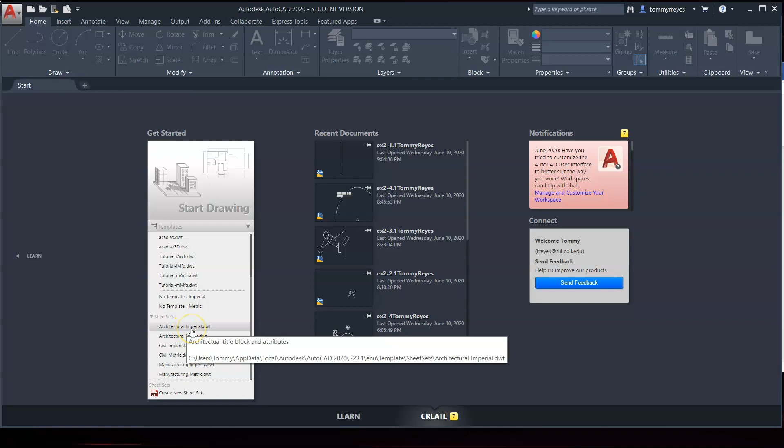That'll start on page 2-1. So let's get started. Click down on this menu right here, open Architectural Imperial Drawing Template, it's DWT for drawing template. Click on that. We're in paper space, so we need to jump into model space. This is the architectural D sheet.

All right, so the line command. Let's go over it real quick. Line command is the letter L, the keyboard command. It's also right here, but I like to use the keyboard. The commands are quicker when you're drafting, and you stay focused, instead of having to go up here looking for an icon. Eventually the keyboard commands become second nature, and you stay focused on your drafting.

How the line command works: type the letter L, and you can see with any command, if you start spelling what you want, it will bring the command up. If I want to enter the command, hit spacebar, and now I'm in the command, and it's telling me right there in the middle of the screen, specify first point. Now I can specify the origin. The origin is 0, 0, 0. Look at that, origin is right over here.

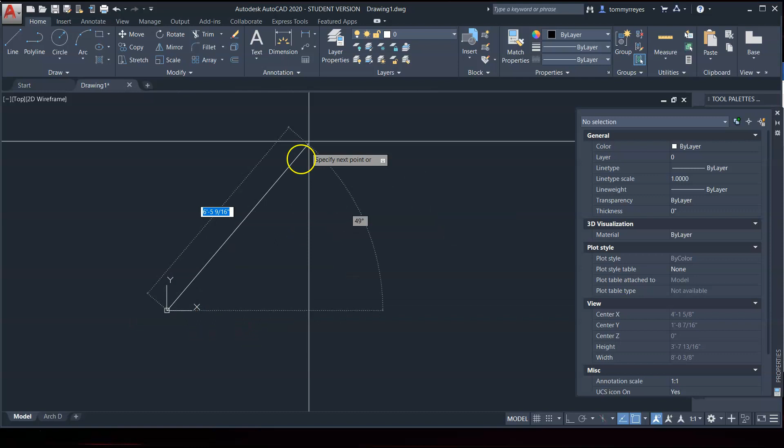I can specify the length, and when I typed that 0, 0, 0, that was me entering coordinates. I don't need to do that anymore. I can specify actual lengths. And if you notice down here, here is ortho mode and polar tracking.

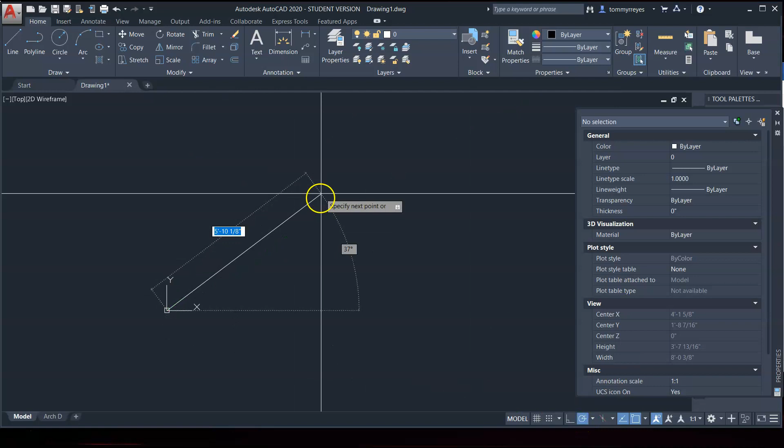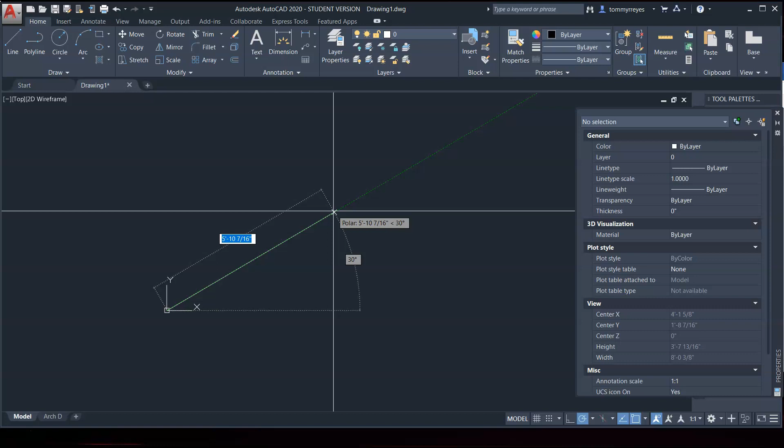Let's just click on polar tracking, and AutoCAD helps you draw lines. And if you noticed, I am drawing this 5 foot 10, 7/16 inches at a 30-degree angle if I was to left click right here. You can see from my cursor there's an extended green dashed line. That's AutoCAD trying to help you, letting you know you're at 30 degrees, or 15, or 45.

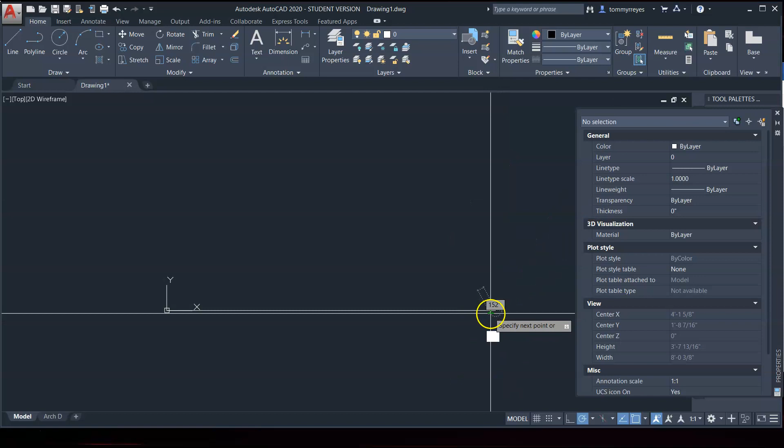Anyway, the reason I'm showing you this is because you can also utilize that information. So let's just make this an even 10 feet. Hit enter, and it is still connected to that endpoint of that line. Again, this is AutoCAD trying to help you out. It's assuming this might be some sort of continuous outline of some two-dimensional geometry. If I want to get out of this command, I could just hit escape.

Inversely, if I want to get back into the command, I can type the letter L and hit the space bar, or there's a shortcut, hit the space bar, and it'll take you back into the last command you were in. Notice how there's that box right there, and then it just said endpoint. That is your osnap. We'll get into osnap in another video. Right now we're just going to focus on drawing lines.

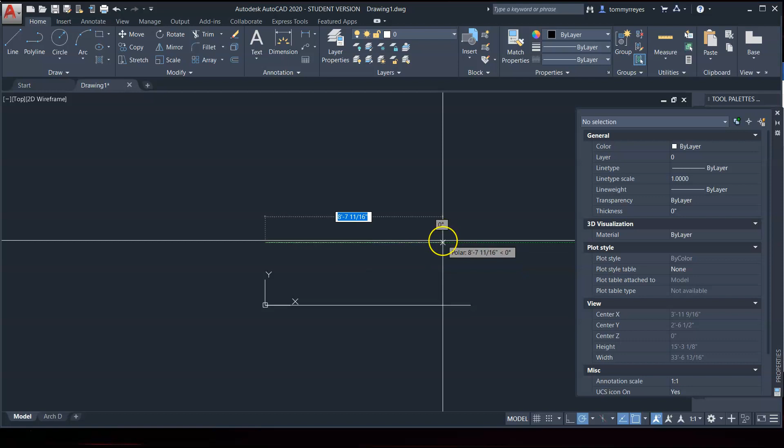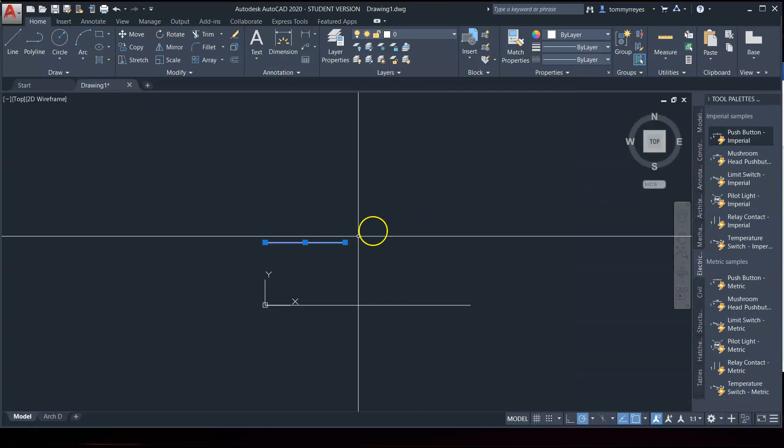I want to draw another line, and show you how to draw in feet. So let's just draw 3 feet, 10 inches, and let's say I want 3/4 of an inch. Hit the dash, 3/4, and there you go. If I want to double check that, I can check it right here in the properties palette. If this palette wasn't up, I can highlight any line, right click, go to properties, and this properties palette will come up.

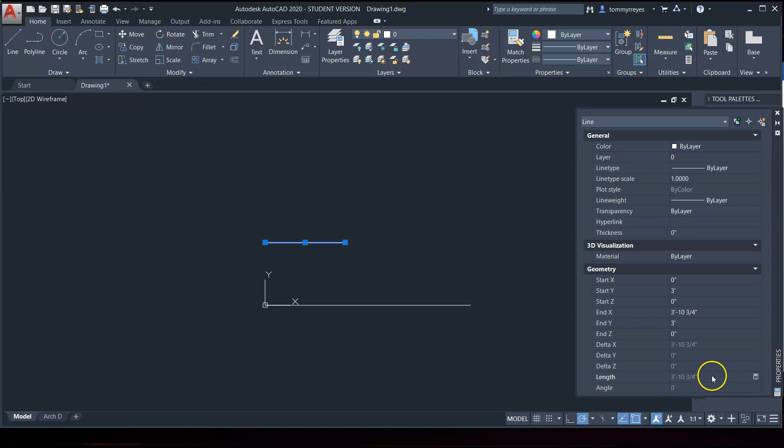One more thing about the line command. So not only can I specify 3 feet, 10 inches, let's put 7/8, if I hit tab, this is part of a dynamic command that AutoCAD has. If I hit tab, you'll see to the right there's a 0 with 0 degrees, and now I'm on that. I can type in 33 degrees and hit enter. So I drew the line at the specified length, 3 feet, 10 and 7/8 of an inch, at a 33 degree angle.

And you see the angle right here. So all that information is stored within the program. You can identify what you did in case you lose your train of thought or get called somewhere. And that is the line command.

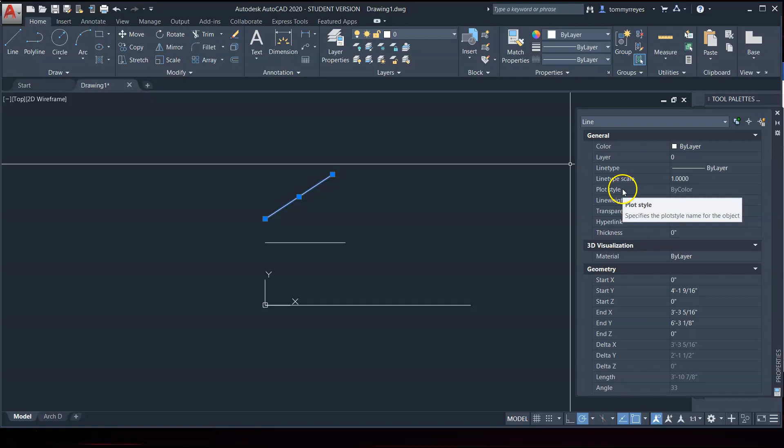And so we went over to properties, palettes. Let's go back to properties palette. The properties palette shows different layers. You can change the color if, let's just say, I am creating other lines to help me draft the lines that I want to keep. We call those construction lines.

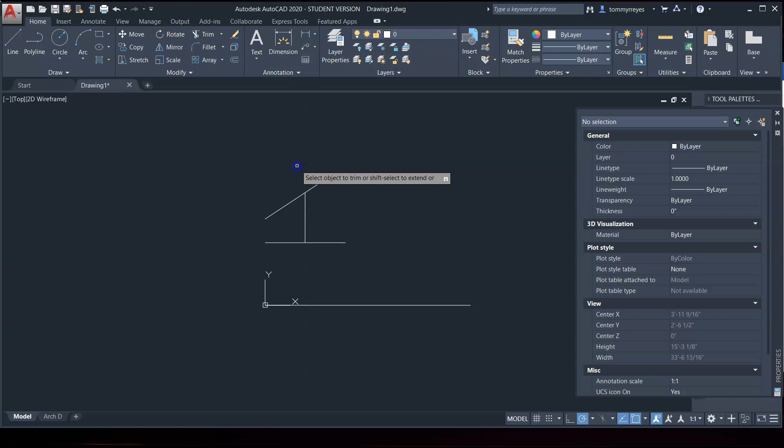So for example, if I want to draw a line here to here from this midpoint, and I want to keep this little intersection but get rid of this top part, I can do that. And let's just say I needed other pieces of information, but I didn't need this. Or I need this, but I don't need it. I need to delete it later.

I can change the color to indicate, to give myself a visual of what I need to delete later. Typically, I make a layer, and I put every construction line that helps me draft on that layer, so I know to erase it later.

I also make sure that when I do create that layer - we'll talk about layers later, they're right here, and we'll talk about how helpful they are. If I accidentally forget a line, it doesn't print out. So I put it on a layer to where it's definitely noticeable that I need to either delete it or ensure that it's not going to get printed out.

Other information that you see, it tells you what scale you're drawing in the tools palette. I've got to select something. Like this one, tells me the angle, the length, the line type. There's various line types. Right now we don't have very many, but there's other line types that are readily available.

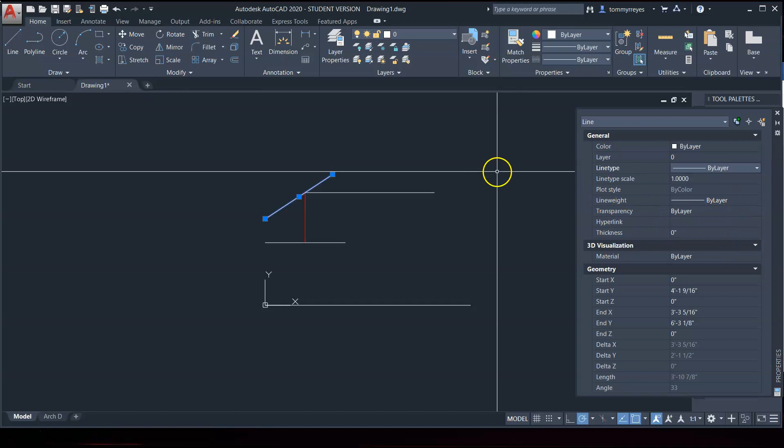In fact, let me open a file to show you just that. So there's a line type for wall, and this line type is done by layers. So you can set up your layers to create a particular line that you're going to use for a wall. And this is a continuous line.

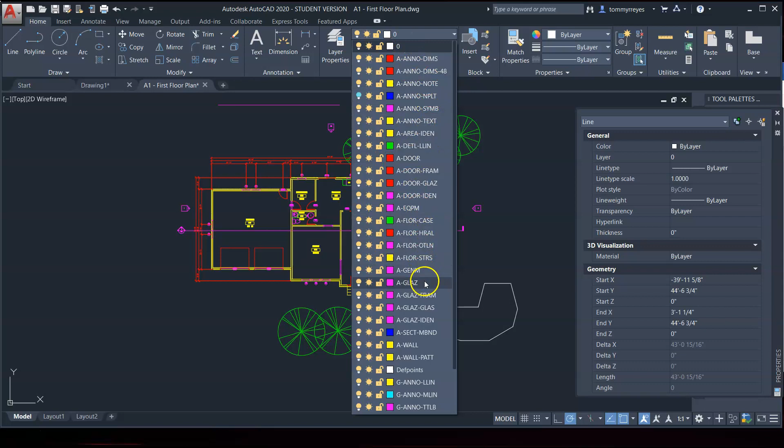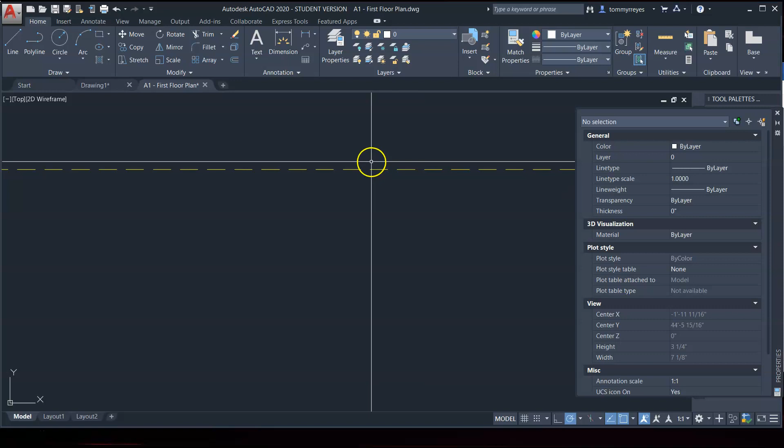There's other lines that we use in architecture, and engineers use it as well, that indicate different things, like hidden lines. Let me see if I can put this on a layer that has a hidden line. Or I could just change it to hidden. And if I zoom in, you can see that it is now a dashed line. Hidden lines indicate that there's something that is underneath or behind something, and as a drafter, you will get to know these different line types.

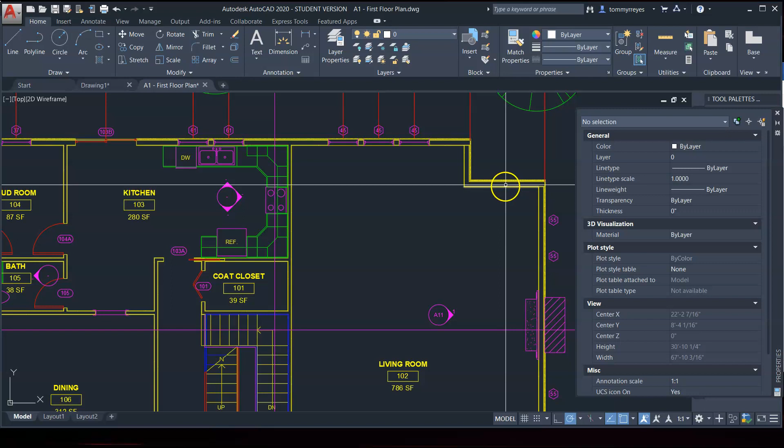Line weights deal with the thickness of lines, and so the thicker lines, typically you want your walls to be a pretty thick line, your text pretty thick and vivid. When you print this on a bond sheet of paper, there's certain things that you want to stand out, and there's certain things that you really don't want to stand out. So like this cabinetry here, because if everything really stood out, things are harder to read.

But if this was like a gray, and this was a lighter gray, and everything in purple was a lighter gray, and everything in green was a medium gray, you can see variation, and that contrast helps the mind process information quickly. This is why we have layers, and this is why we control our line types and line weights. We'll eventually get into that in more detail in another video, and I'm just trying to give you a heads up of what to come.

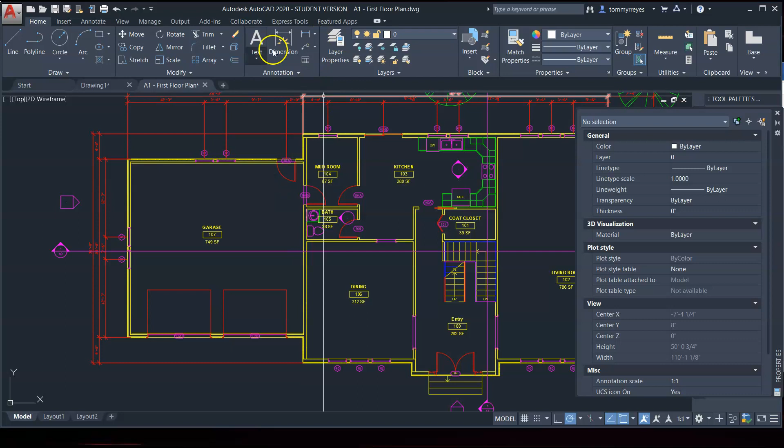All right, so if you turn to page 2-8, we draw everything to full scale. So that was just an example. Annotation scale is right here. I know it also says it in the properties, but that's a little different - that's talking about one particular line. This is talking about the whole drawing. So when we deal with the whole drawing, a 1-to-1 scale is the ratio that engineers use, and that's correct as well. But architects use 1 foot is equal to 1 foot, and so I typically use that.

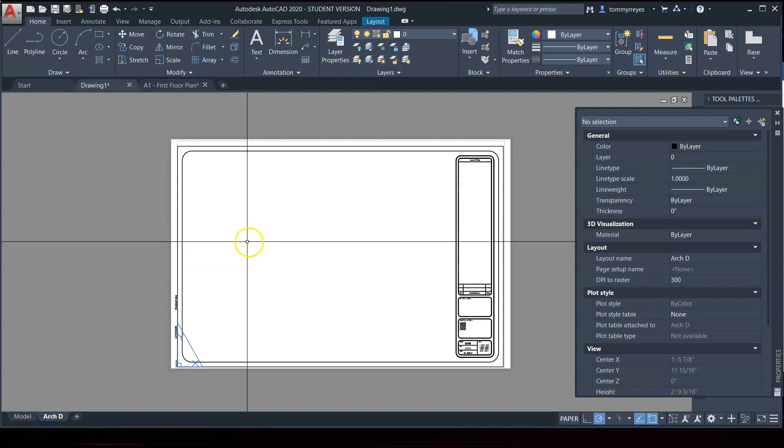And now our drawing is in full scale. The reason why we do it in full scale is so there's no calculations needed. I can go over here and jump into here and create a viewport. We'll get into this later.

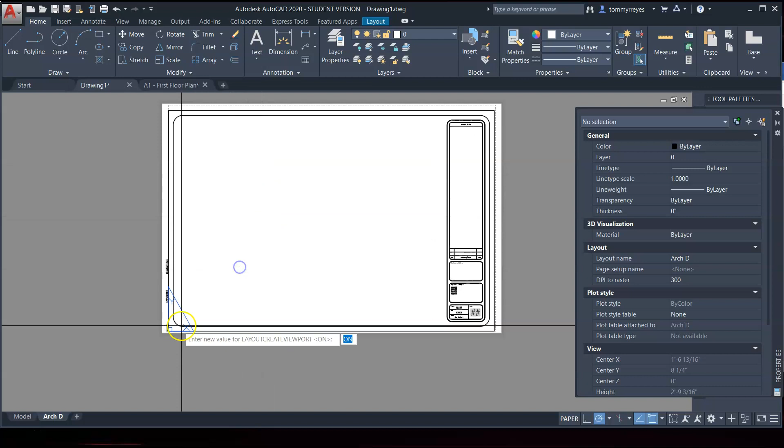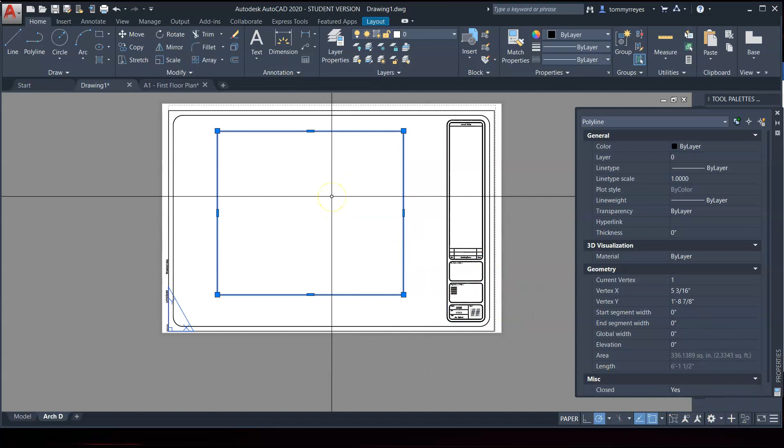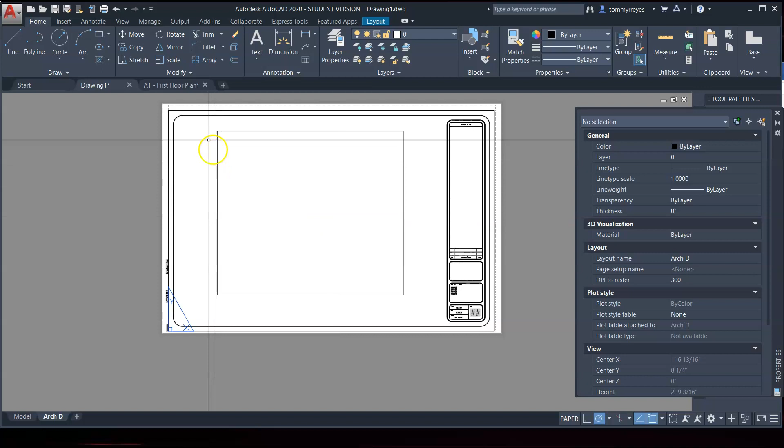And we can make this a viewport, and we can look into this, and within this viewport we can scale down the drawings. I don't know what's going on right now with my viewport. There we go. There's my viewport, and this is a window into my model space.

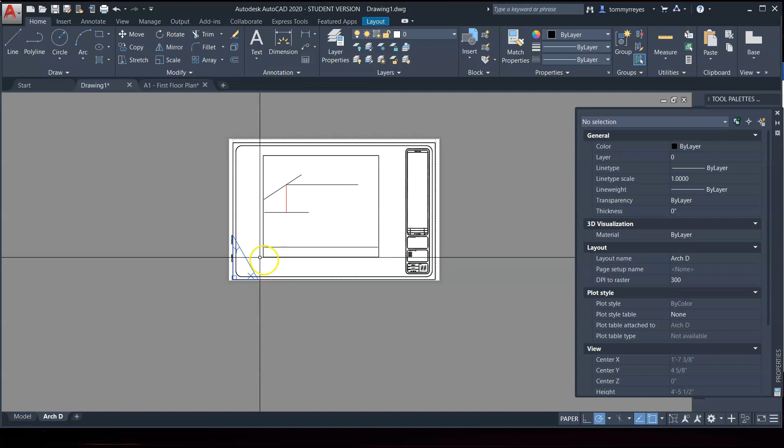And we use viewports to organize our blueprints, in layman's terms. But these are our construction documents, and we don't necessarily need this drawing that big.

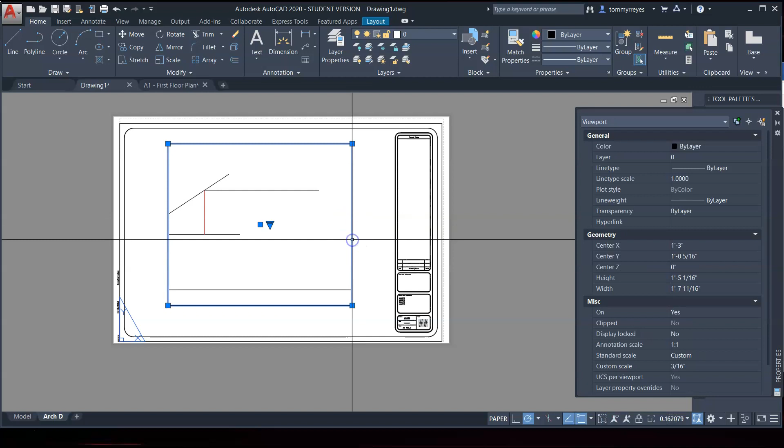And what I can do is find the scale of this and change it. I can change the annotation scale to, let's say, 1/4 of an inch. Let's just say I wanted it to be, for every 1 inch is equal to 1 foot.

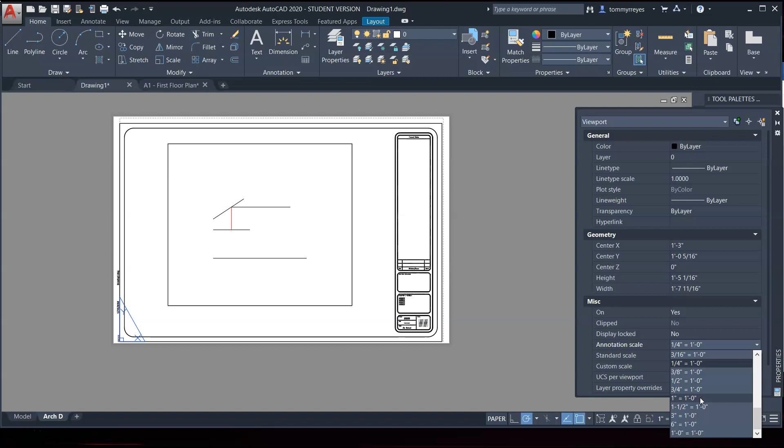And that's why we draw everything in full scale, because we can control how it's presented in paper space when we go over here with viewports.

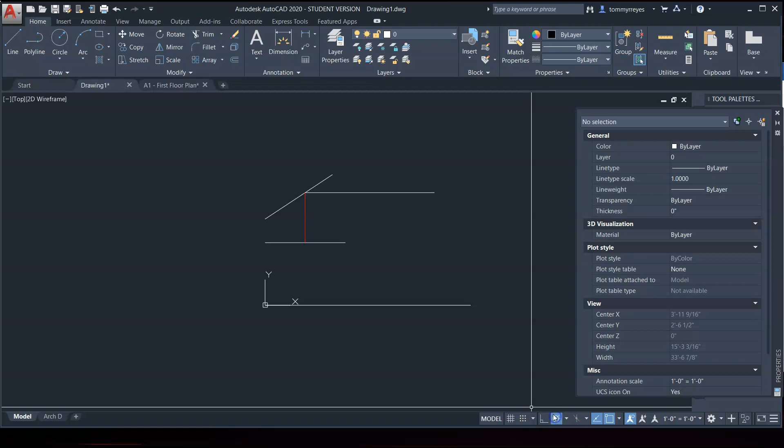So I showed you ortho, I'm sorry, polar tracking. Polar tracking is right here, ortho is right here. These are important, and they help you draft in such a way that it tells you angle increments, at 30 or 15 degrees. I typically like to use this, or you can have 5, 10, 15, 20, 5 degree increments, and all I did was right click on polar tracking.

And now when I go and draw a line, you'll see that green extended dashed line at every 5 increments. And that's kind of annoying for me, so I'm going to go back to what I like.

So that is polar tracking, and that'll help you with drawing floor plans, elevations, and roofs and stuff like that. That's very useful. But when drawing floor plans, I find that ortho mode is the best mode.

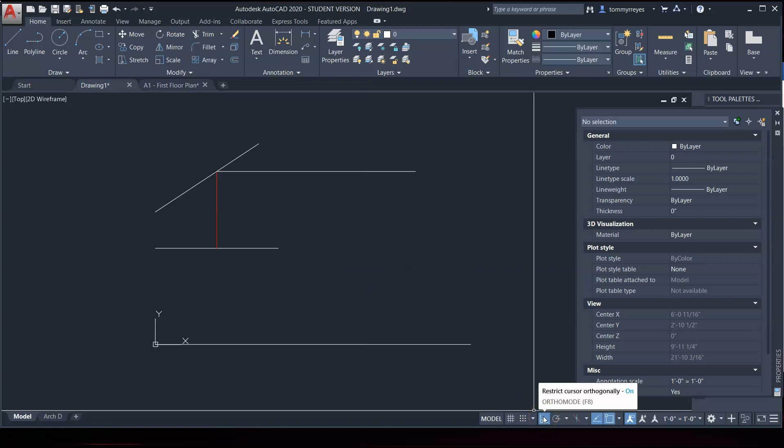I know it says F8, or you could hit Control L, or on a Mac you could hit Command L. And now I'm in ortho mode. So, line. And ortho just means 90 degrees. I can only draw lines in 90 degrees.

And if you're drafting a floor plan and there's nothing but rectangles, well, you only need 90-degree increments. You don't need 30 or 15 degrees. And so this is very useful, and it also ensures accuracy, more than polar does.

I've drawn floor plans where I used polar, and some of my field measurements weren't quite adding up. And when I went to check and see why some of my line work wasn't connecting when it should have been, there was a little variation in degrees in terms of drawing lines.

Where in ortho mode, it only does things in 90-degree increments. So it is 0, 90, 180, and all the way around. And when I draw floor plans, or straight lines, perpendicular lines, I like to use ortho to give me a sense of security, 1000% assurance that this is going to be perpendicular and not half a degree off, throwing off my entire floor plan.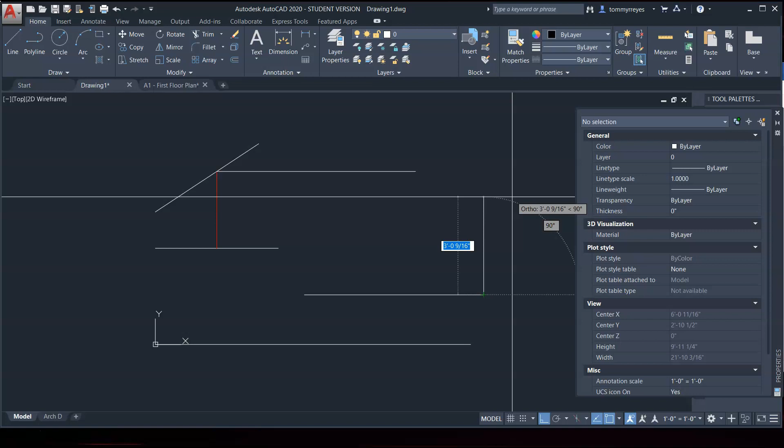All right, and so now we'll get into drawing other lines. So we need to draw a line that is 1/8 of an inch, and another line at 600 feet. So let's go ahead and do that.

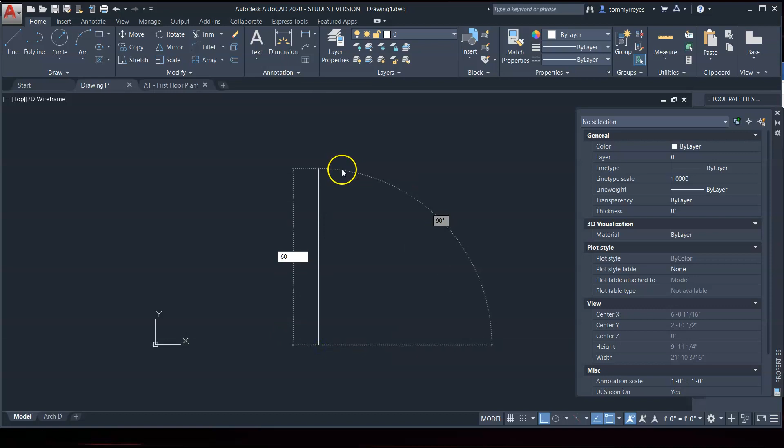I'm going to go ahead and get rid of these. So, line, go, and I'm just going to draw anywhere and just type in 600 feet, enter. Draw another line, 1/8 of an inch, and there you have it.

So now you know how to draw in feet and inches with fractions. Let's get into drawing shapes.

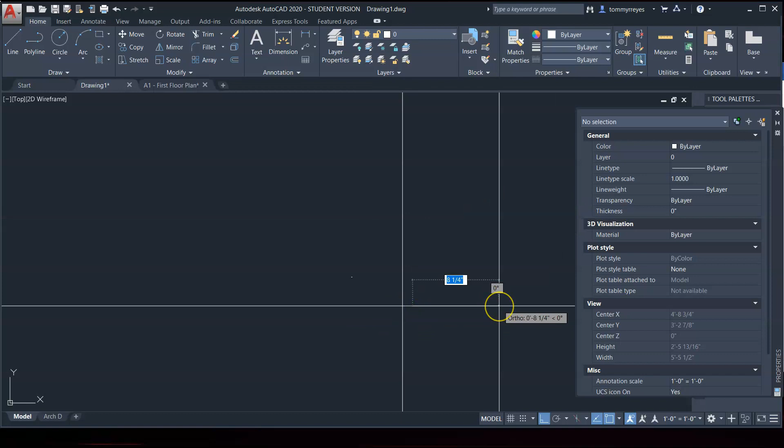Oh, sorry, we skipped some information on 2-7. Let me backtrack. So it wants us to draw a line that's 5 feet 6. So I could do 5 feet 6 inches, hit enter. That's one way to do it.

I could also draw another line, same length, at 5.5 feet. Because 0.5 is a decimal for half, and I know half of a foot is 6 inches. Not that you have to memorize conversions, but if you know the conversions, you can use a decimal in place of a fraction. And that's okay.

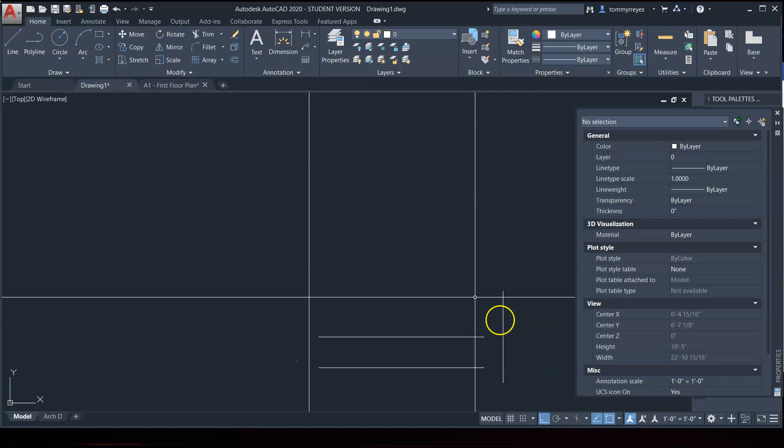So I need to draw another one at 3 feet. I can also just do this in inches because I know the conversion: 3 feet is 36 inches. Oh, I'm in ortho, I need to get out of it. There we go. Out of it.

Also with lines, there's grips, so you can change the size of a line. Just left click on the grip and drag, and there you have it.

So now let's, sorry about jumping back and forth. That was 2-7, and we kind of skipped to 2-8, 2-9 for polar and drawing everything to full scale and why. We also drew the 600 line on page 2-10, and let's go over to drawing shapes, rectangle and circle.

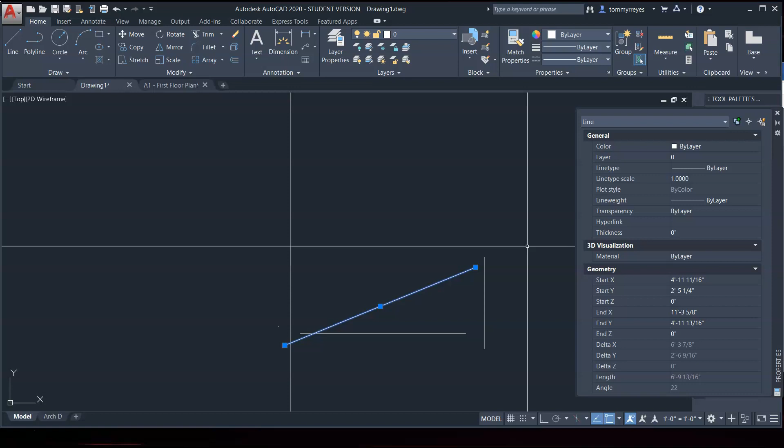Alright, so drawing a rectangle. The command for rectangle, and again, when you want to get out of any command, I always make sure that before I start any command, I hit escape to make sure I'm in neutral, like I'm sitting at a stop sign driving a car with a manual transmission. Throw it in neutral, and then I disengage the software from any commands before I jump into a new command.

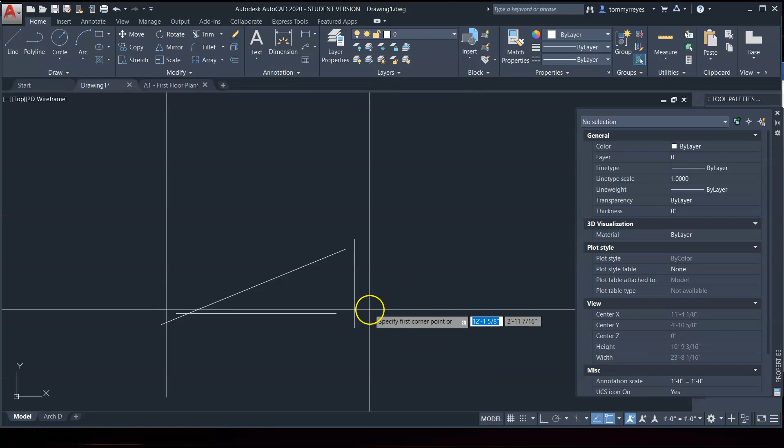So drawing a rectangle, the keyboard command is REC. You'll have to specify one point, so I left click anywhere arbitrarily, and I can drag and drop. I'm going to go ahead and do that again. Oops.

REC. Or I can specify particular lengths and widths. So I'm going to enter 3 feet, 10 and 7/8 of an inch. Oops, I accidentally hit enter. I was supposed to enter the other length, and that happens. I have a trigger finger on my pinky where I accidentally hit the space bar. 7/8, and the other measurement it wants me to enter is 8 inches. Now I could hit tab or I could hit comma. So I hit tab, 8 inches, and there's my rectangle. So this is a 3 feet 10 7/8 inch by 8 inch rectangle.

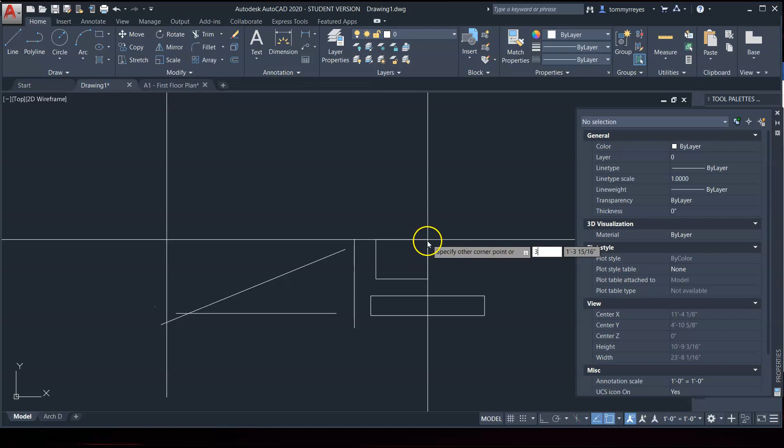You could do the same with the other one that it's asking for. It's asking for another rectangle that's 3 inches, so REC. So 3, tab, and 7 1/8 inch. And there's the other one.

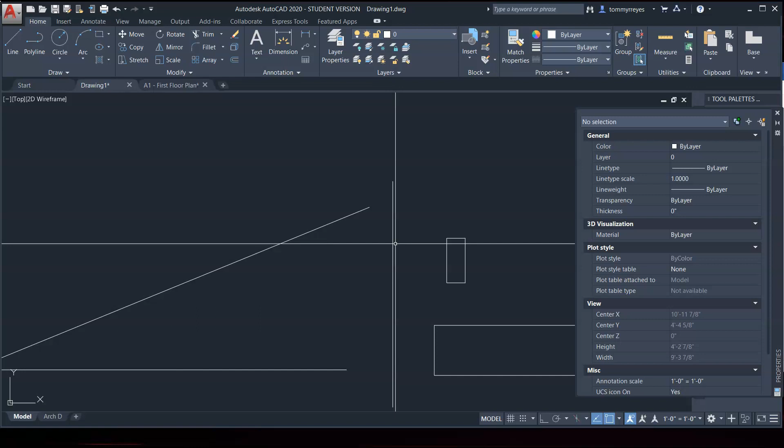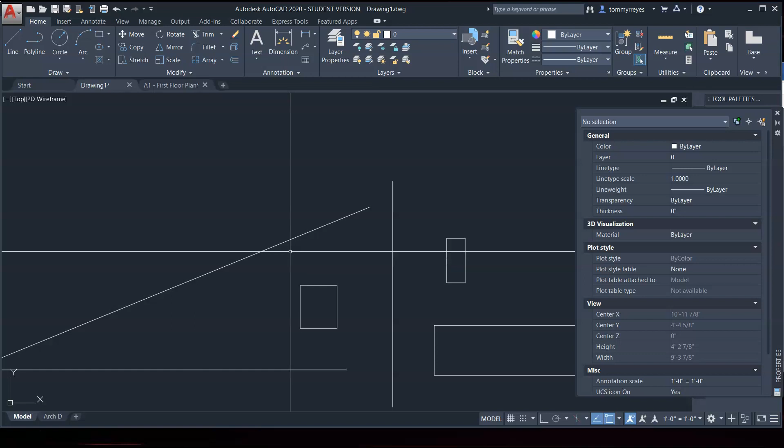It's asking for one more, but I think you guys got the idea. Oh, it's talking about the padlock, you can lock that in. So let's explore that. So 6, tab, and you'll notice the padlock is right next to the 6—it's automatic. And I need 6 7/8 of an inch. So 6, 7/8 of an inch, and there's my other rectangle.

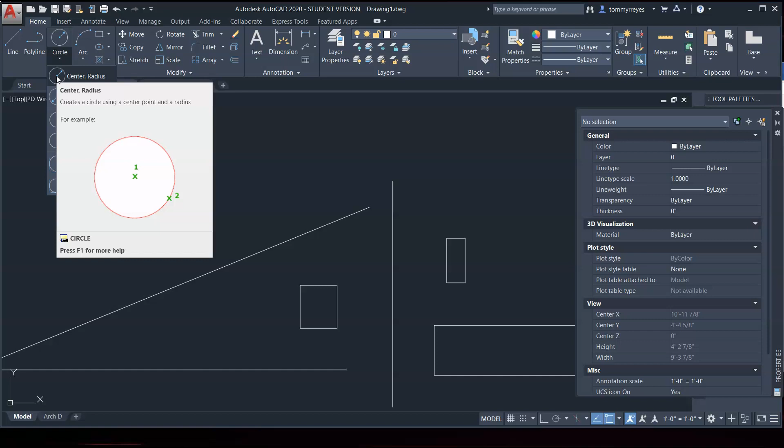Now it's asking me to draw a circle. The keyboard command for circle is the letter C. Enter, and it will automatically—so here's circle. There's other ways to draw a circle. The most common way is center radius, and it just goes from this center point, as you can see right here in the little diagram. I specify my first circle, and I need to specify the radius.

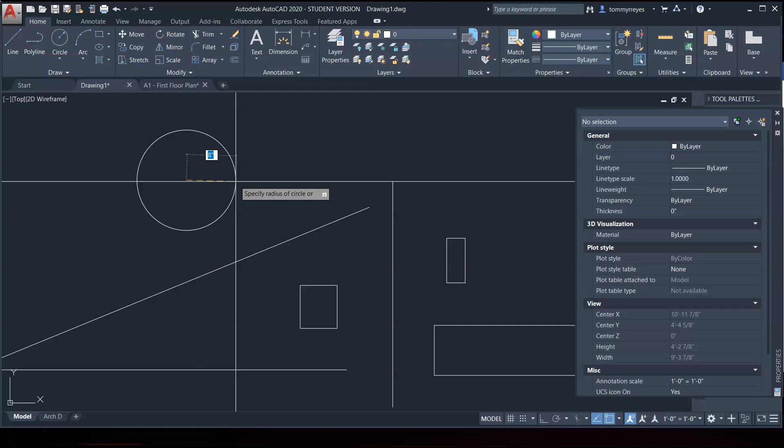And this radius is 1 foot 6 5/8 inch. 6 5/8 inch. And there you have it. Now I've drawn a circle.

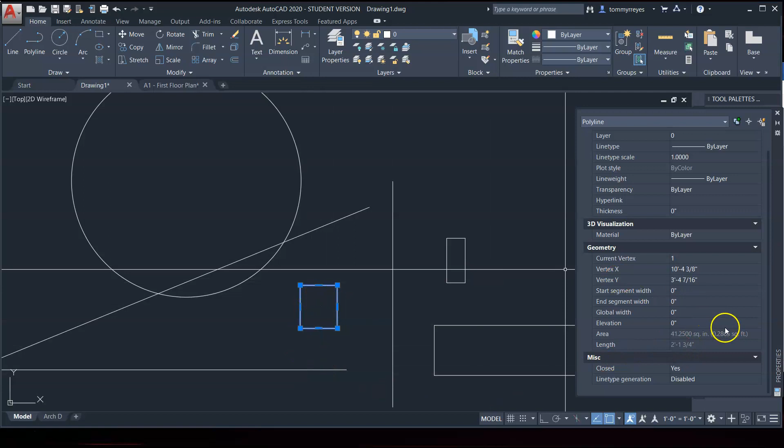So I can also right click over here and hit auto hide, and so when I'm not using that, it goes away. If I need it, it's right there. That's useful so you can have a lot of surface area to work with.

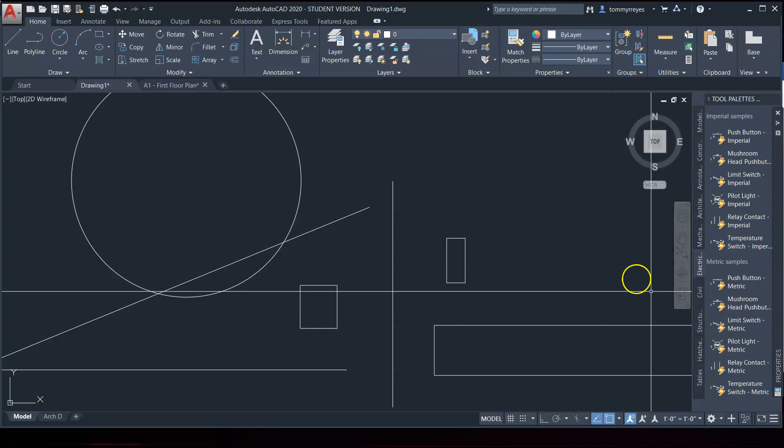Okay, let's see, what else? Okay, so that's all we need for this drawing. Let me go ahead and clean some of this up—delete, move, and go ahead and save this drawing.

So Control Shift S, save as. Let's go back, and assignments, and this is 2-1. Hit save. I'm going to replace it—I did this before. And don't forget to plot this into a PDF.

Now for Mac, this is a little different. There is a little PDF drop-down menu, you can click on that. You'll select any printer and then select Save as PDF, and it'll plot to PDF.

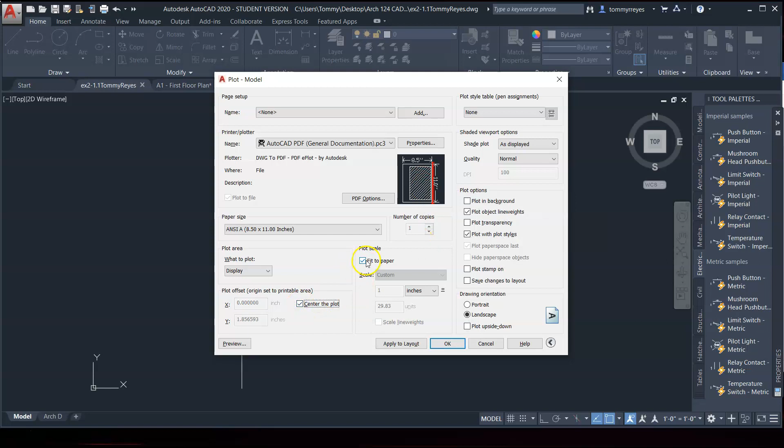But for PC, if you don't have Adobe, you can use the AutoCAD PDF. I would just go with the general documentation, don't go for high quality—you're submitting this online, and these file sizes might eventually get too big. So just right now, get in the habit of general documentation, hit center plot, fit to paper, and then we can preview, and that's what it looks like.

I can right click and exit. I can also use window if I want to make sure I get everything. Preview, and yep, that's about right.

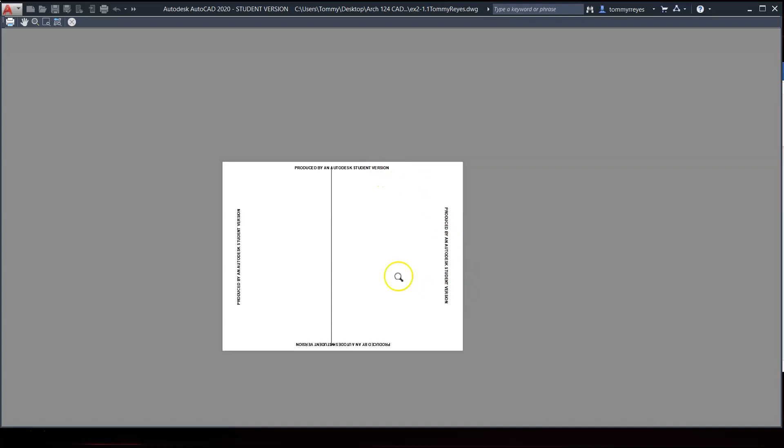This says produced by an Autodesk student version—you will get that because this is a student version. Right click on the screen, hit plot, and you'll save this as a PDF anywhere.

I'm going to go ahead and save this to AutoCAD, assignments, and save. Go ahead and replace that, and there you go. That's it—go ahead and submit both the PDF and AutoCAD file for this assignment.